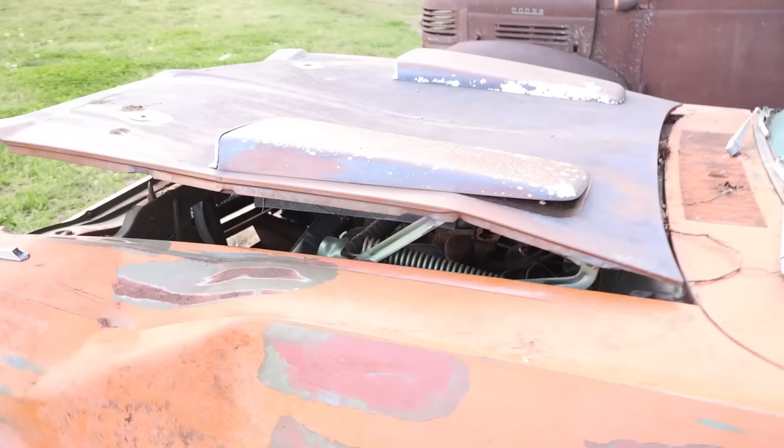But check out that, that is the fun part right there. Now, what's going on under the hood? Well, that may or may not be a problem. More than likely is, as you can see, the hood doesn't really do anything anymore. But up under here, there is an engine. How much of one is left? Not a lot. But it sure is a cool looking car nonetheless.

I want this thing to be a screamer. I'm talking ripping gears, spinning tires, you name it, this car should be able to do it. But it's not going to do it in its current form. Obviously, we've got a lot of work to do.

If you remember the Valiant that I rescued from the woods that had been sitting for like 40 plus years, this car was on the same property.

This thing didn't get any favors from Mother Nature, but that stops today.

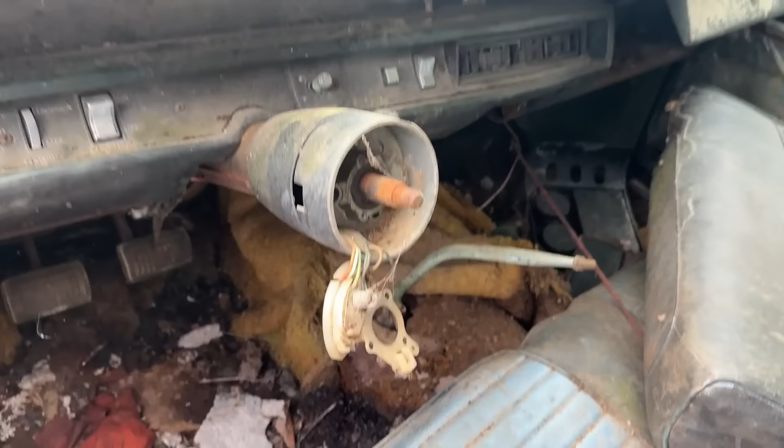A lot of noises. Oh, it's basically restored at this point. Look at there, brand new tire, all the tread. No steering wheel, so I'm gonna do the old trusty vice grips.

Will it not turn? Nothing's happening. Oh boy, it moved a little bit. Here, stand back, I'm giving it a swift kick.

What the heck? Nothing happened, that's not good. I didn't know that was a problem. I didn't either, how does that even happen?

I sure hope our transmission is going to hold up because the inspection cover has completely rusted away. That's not good. No, I mean, the good news is our frame rails still look good, at least up here, where the engine is held together.

Yeah, I mean, it's a manual steering box. I've never seen one just freeze like that before. I wonder if somebody pulled it by the tie rod or something, but it don't look like the tie rod's bent.

That might be a little bit of a problem. Not too sure if you knew that or not. Who needs to steer? I mean, we're going straight anyway.

Hey, Briar, that's bad.

Nothing's happening. Really just need to get this hood off, don't we? That would help.

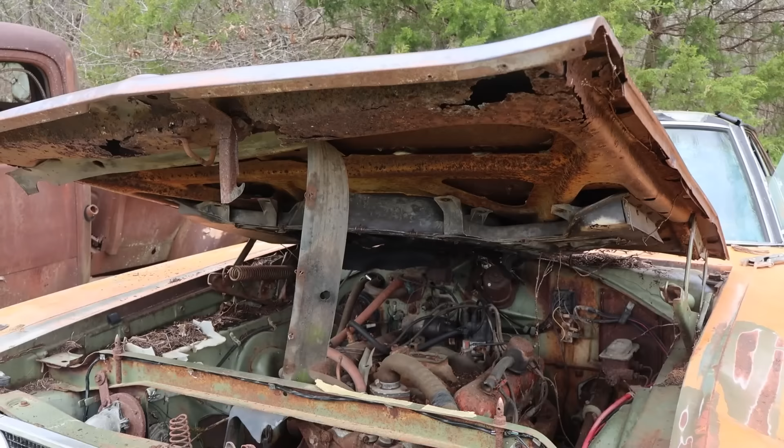Well, we were doing a little looking around and we're thinking that the steering box or the column itself has just frozen up completely. Interestingly enough, it looks like the previous owner had stolen a Coronet RT grill or a Super Bee grill. Somebody stole the little emblem out of it, but look at this, this is a factory air grabber hood. All of that's there, scoops are there. I noticed the scoops, but this is the first time I'd ever picked the hood up. I didn't realize it was a factory air grabber hood. That's awesome. It's not original to this car, but that is all original stuff. Pretty rare.

This is fun, I love it. Nice and slow, slow and steady wins the race. I'm afraid we've gotten in over our heads already, and we haven't even started yet. Hopefully not.

Sir, did you order the Coronet? I don't think I want it anymore. Well, I need somebody to sign. Could you sign this paper for me? I just work here, man. Just sign this paper for me. I work here too, I promise. Sir, I need you to sign this paper for me. Hey, you bought it, didn't you?

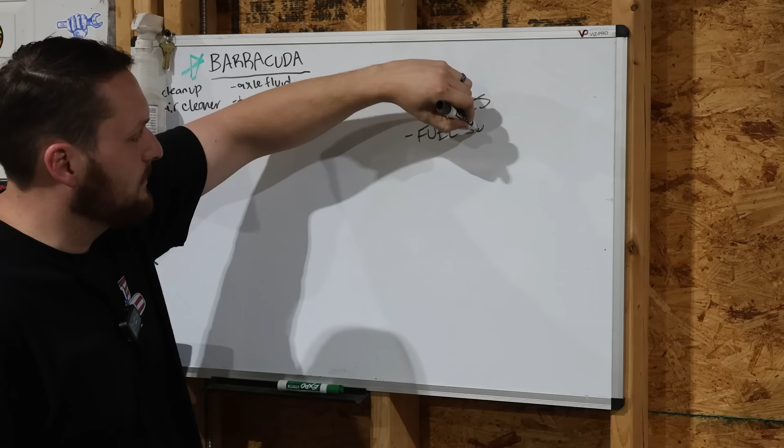So what are the necessities? We've got to actually do brakes, that's a big deal right there. Got to make sure we can stop before we can go. Next, we need something to power our engine, so of course a fuel system is in order. Obviously we need an engine, so that would be a big deal, we got to make this thing run. That's if our transmission works. Got to wire everything, so there's no telling what's wrong with this thing as bad as it looks, but we got to work out the electrical, and we can't let it overheat, so cooling is a big factor in this one. We're doing gnarly burnouts, we got to have something that'll spin the tires, so gears, but it may not be in the budget, so who knows.

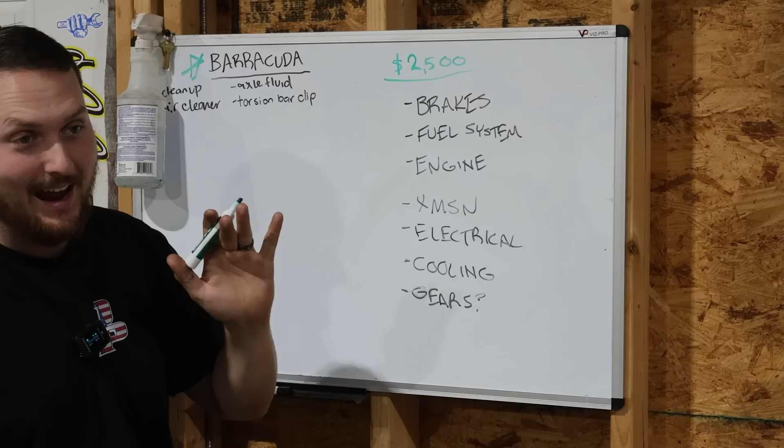Speaking of a dollar amount, what is the full budget? $2,500 smackaroos, that is it. And the bad part is that if I divide 2,500 by all these out, that gives us roughly $357 each. So we're going to break this down into 3 different categories for our pricing system.

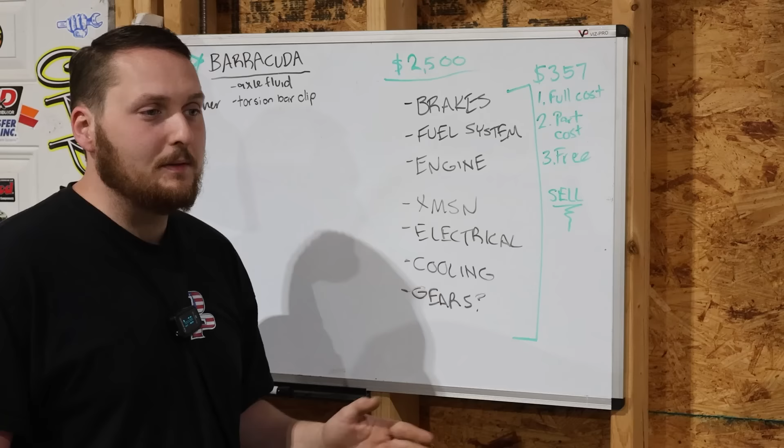Some things are just going to be straight up full cost. Like if we've got to buy gaskets, if we've got to buy this or that, we're going to have to attribute that to, hey, we had to spend this, therefore it goes to the full cost of the build. The second category is partial cost. Something that I purchased or something I already have, we're going to attribute that and say, this is what the percentage of that would be worth. Like for instance, if I've got a clutch over here that we're going to be using if the 4-speed works out, I did buy all this new, but it is technically used, so if I saw it on Facebook Marketplace, I'm going to count it as a percentage of the total cost of what it would be new.

Then at the very end, things that are going to be free, things that I just find laying around. And if we go over the budget, we have the option to sell items. So if we pull something off the car, we're like, hey, this might be worth something, or we might be able to do something with this later. That is value added back in that we will be able to put towards that $2,500 total.

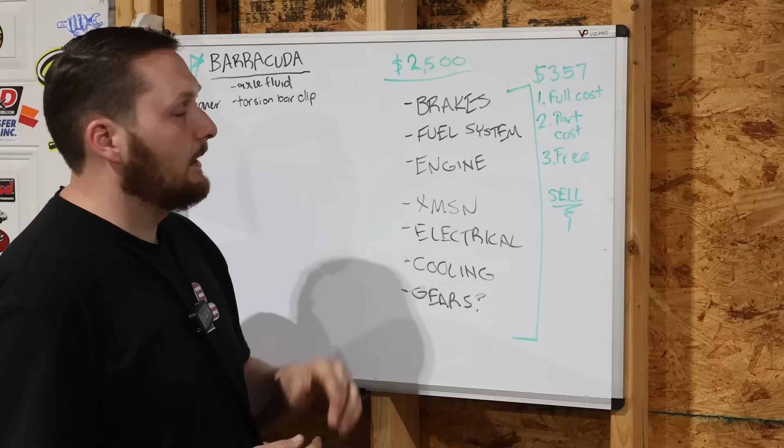Is this going to be fun? Absolutely. Is it going to be really hard? Yeah. Now, a quick little disclaimer: I paid $1,000 for this car, but I'm not including that in the budget because you might have spent way more or way less than what I have in this car. The only thing I'm trying to prove is that you don't have to spend a ton of money to have a lot of fun in an old car.

You might have something in your shop or behind the house covered up in a tarp that's been there for years, not running. I want to show you that you can do it, and you can get a little bit of money scraped together and have so much more fun than you realize. On top of that, the prices that I'm going to be listing in this video, you may find it cheaper, you may find it way more expensive. It's all determined on what the car is, the availability in your area. I'm just basing it on what my experiences have been and being super patient.

This stuff I've collected over years of working on these old cars. It may take you some time to get some stuff together, but if you are persistent, you don't give up, and you are constantly searching for these parts, you can do exactly what I'm doing today.

You getting the good side? Which side is that? I don't think there is one. Hey now, I'm sorry, Coronet. Whoa, I apologize. This side is so beautiful. Don't insult my Coronet 500, okay?

So again, this is a 68 Coronet. As you can see, there are multiple different colors on here. This appears to be the factory green, and it was green with probably a green interior, and then at some point possibly painted blue or purple, and then it got painted orange.

Wait a minute, why is that the same color as the hood? But no, this is a factory 318 two-barrel car with a 3-speed on the column. I decoded the VIN and it tells me all that.

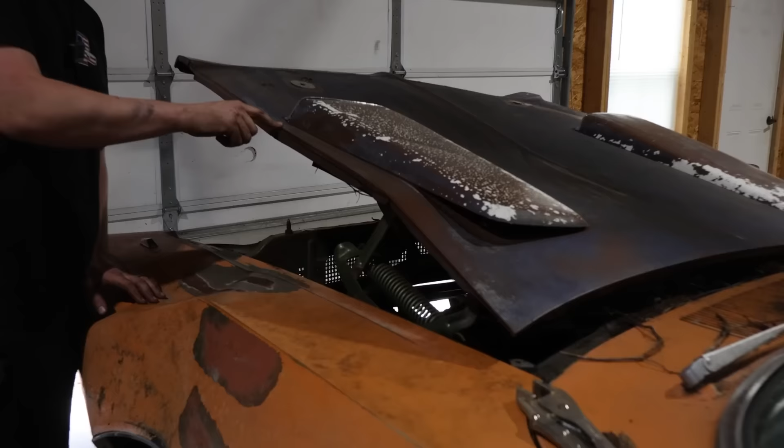Why is that the same color as the hood? The car got painted orange and it has a vinyl top on it. Oh wait a minute, there's the factory color for the hood. You can see it was this bronze color. So they painted it this color, but for some reason left this. It could have been black, honestly, and it just faded to purple.

I think it's been every color, honestly. The inside, it's there, not much to speak of. They had a blue bench seat in here. That is demolished. I've never seen the worst seat I think I've ever seen. Never seen one do that.

But the weird thing about it is, as bad as this car looks, the floors are pretty solid. I don't know how. He did have it up on blocks, so that might have helped save it, but the floors are actually decently solid from what I could tell.

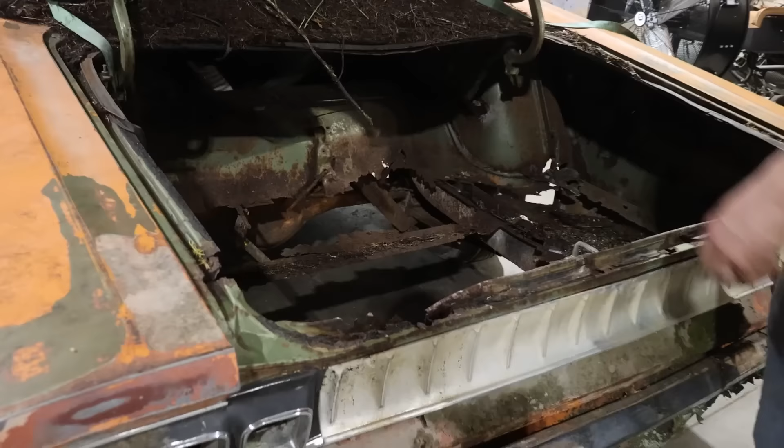Now, I say that for the inside of the car. The best part about it, really, the factory trunk delete. Bam, weight reduction. So yeah, there's not a trunk, so we really aren't going to be hauling anything with us. I think we'll be doing good to get the car down the road.

Oh, you were going that far? Maybe, I don't know what's possible at this point, because I don't even know how you're going to hold the trunk down, the whole support's gone. Beautiful ratchet strap right there. Oh nice. Oh, so we're good. Yes, that's all you need is a ratchet strap for the trunk.

Check out this chrome. Ooh, shiny. That must be 500. And I think it was an AC car because the glass is tinted.

Oh, this door don't open. Please don't tell me. Well, that's your door, so I don't have to worry about it. Drats, I'll just have to break the window, I guess. I guess so, that's fine.

Wait a minute, wait a freaking minute. Figured it out. Let me tell you a little story. The guy I got this car from had a 68 Coronet Hemi car, 4-speed, with a supercharger. I've seen the car personally, I witnessed him driving it down the road. He pulled into a store like it was a daily driver. The quarter panels were cut out of it, had zoomies going out the side, a giant supercharger, and it's a factory Hemi car with a 4-speed and a supercharger. I think it's still around here somewhere. When he passed away, this was another car that he had.

Guess what color that car was? No way, it was that color. Oh, the bronze. It was a bronze. So guess what, we've got his hood. We have a Hemi car hood. Best that I can guess is that's what this car came as, because it's a 68 Coronet, an RT or whatever he had, or a Super B, and it's this color, and I have the hood for it.

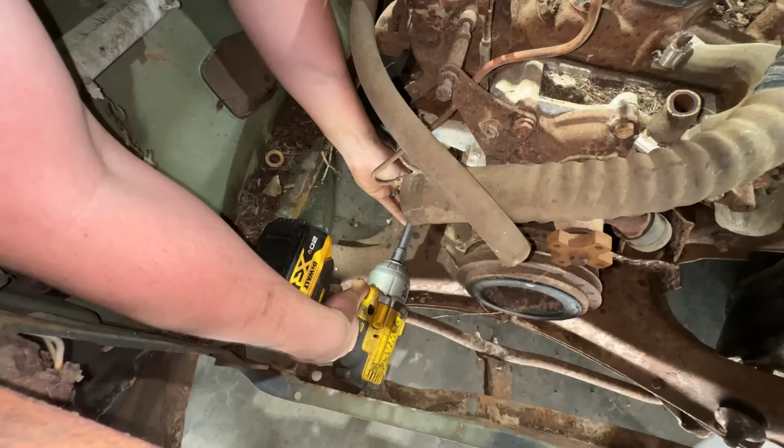Woohoo, one solid piece! Let's go, we're under the car. The floors, how do they look, Briar? They're all right. No, brother, they're immaculate. What are you talking about? Have you seen the rest of this car? These floors are fantastic, considering what this thing is, so good.

There's no rust that I can see at all until you get to the trunk. The trunk is obviously the worst part. There's an 8 3/4, the fender tag said 2.94 Sure Grip. I like it. The frame rails, at least where they count, look really good.

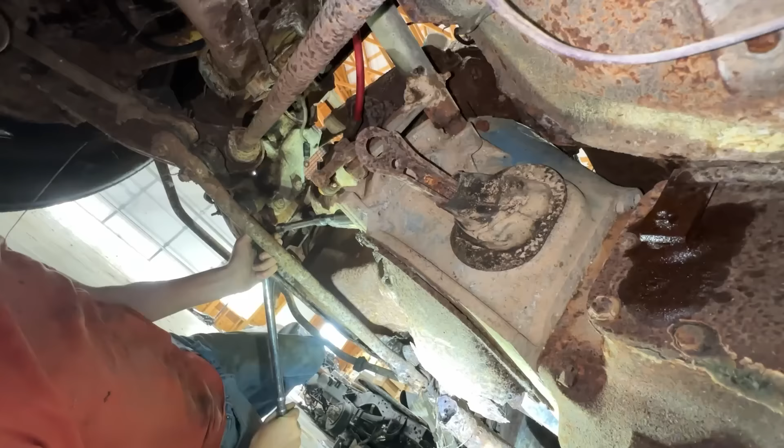Briar's working on motor mounts, and I was working on getting the 4-speed shifter and everything out of the way. The clutch, I don't know if the shifter's gonna work or if the clutch pedal itself is gonna work. We had no trouble at all with that one motor mount, but Briar cannot get that other one to come loose without a breaker bar. It's getting ugly. It is, yeah, severely bad.

I decoded the fender tag and it told us quite a bit. This car was a factory 318, and that's what we have here. But it was a 3-speed on the column, not an original 4-speed. You might be able to see right down in there, I know it's a little dark, but there are the original bushings for the 3-speed shifter.

That means this car obviously had a 4-speed put in it, which is really cool. So it's really nice, but my guess is that this is obviously the original engine. You can see the original paint being that metallic green.

So we're pulling the original engine out, and it's bad. We couldn't get the distributor to come loose, it's stuck in there, it won't turn. So I just pulled the cap off, and we'll hope for the best.

The engine's locked up, the water pump is even locked up. So the hood being elevated like it was, especially in the front and back, allowed water, trees, and everything to fall down in here and lock everything up, which is surprising because the rest of the car is held together, shockingly enough.

But I just wondered maybe they were robbing parts off of it because there's no radiator, no fan, no anything else that we had to really remove, no bracketry except for the alternator bracket. But everything else was pretty much gone. The only thing we had to do on the top side was remove the spark plug wires and then do the motor mounts. That was it.

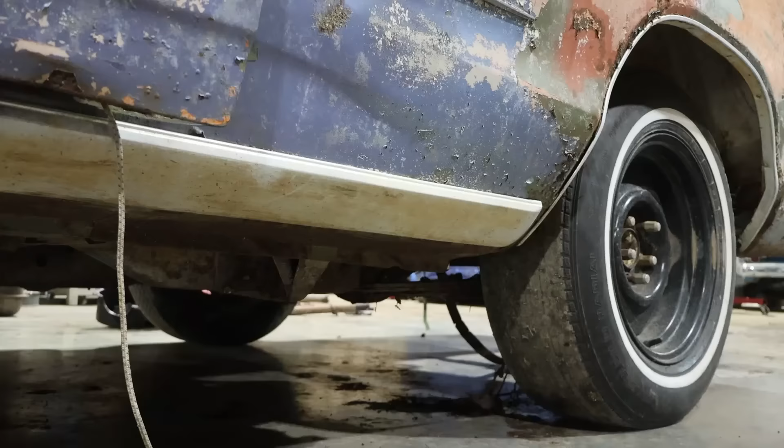Another little fun fact is when I was decoding the fender tag, if I read it right, this shows a 2.94 Sure Grip. Both of them spin, I haven't checked that yet, but how cool is that for a 318, 3-speed, and a 2-barrel? A Sure Grip? Pretty neat.

So we're going to actually rob that and probably use it for something else because we've got some better gearing in mind for this old rig.

The only issue that we really had was that bolt down there for the mount decided to break inside the mount, so we ended up having to pull the mount away from the block itself. We'll worry about getting that out when the engine's out of the way. But now we have our chain on, transmission cross member is pulled. It's going to be fun.

What do you think, Briar? I hope it comes out easy. There you go.

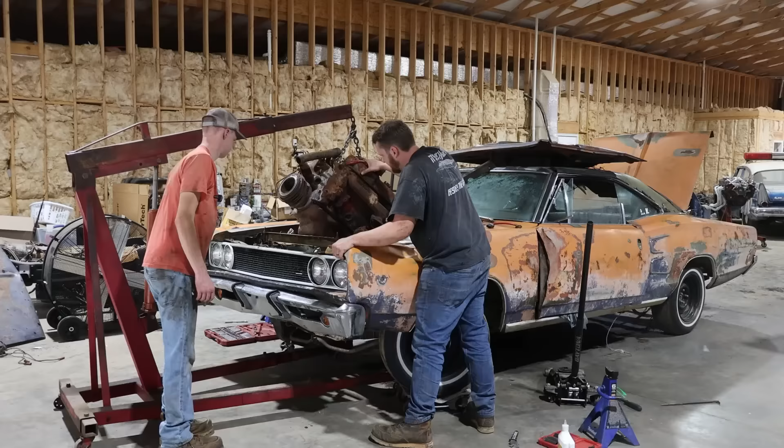I don't think it could have been more perfect though. Scraping the core support, scraping the firewall.

Whoops, hang on one sec. I can swing it. Well, no I can't. Just keep on going, if it'll let you go, then go. Come on baby, I want the 4-speed. Watch it, stopper. Heck yeah.

Only a giant puddle, no big deal. That sucked, that was not fun at all.

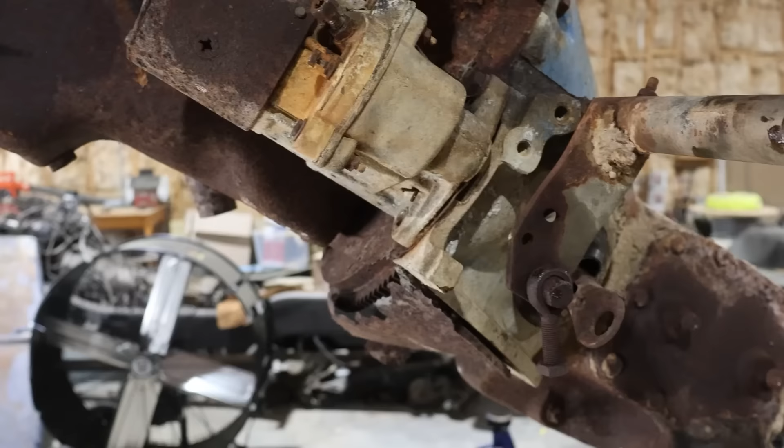Who knows if it'll actually work. The exhaust rusted in half on this side and the other side, and I really hope that our shifter mechanisms decide to work. It looks awful. I couldn't get the distributor out, so that held us up too. It's completely unbolted and it won't move.

Did you say you wanted it? I don't think I do want it now, looking at it.

Well, our transmission is on the ground, but we noticed this. We have an ear broken off on one of the mounting bolts. There's still 3 in there, but one of them is missing, so hey, 3 out of 4 ain't bad. That bolt is not wanting to come out.

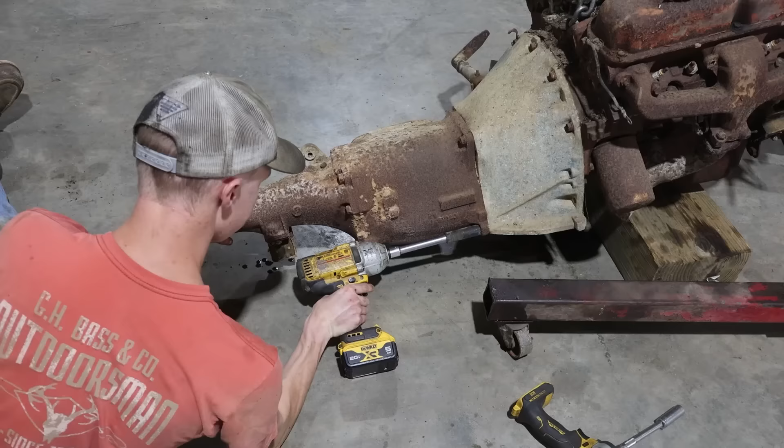Nice. Oh, that was bad. Well, here's the hard part, I gotta catch it. There ain't nothing light about that bad boy.

Hey, I'll get the heavy piece. Don't worry about it. Okay, thank you, appreciate that. I want to see how long it takes him to notice that there's 2 forward-facing bolts.

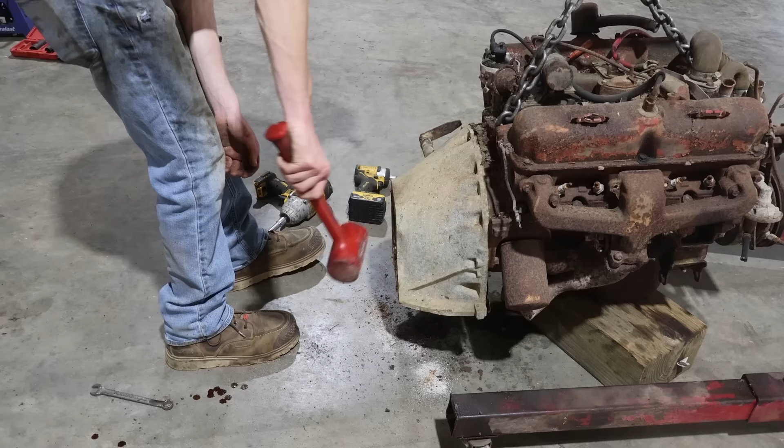So far, he hasn't noticed. I'm not gonna say a word, but I had to walk away because I'm laughing.

Before you wedge that in there, would you like me to give you a little tip? What did I miss? You want to check the 2 rear-facing bolts? Yeah, I thought about it, but then I was like, I never pulled a manual, so I didn't know the bell housings both had those. I was gonna let you go, but then when I saw you about to wedge that sucker in there, I was like, yeah, I better not. I wasn't gonna go far with it. Just until it broke in half.

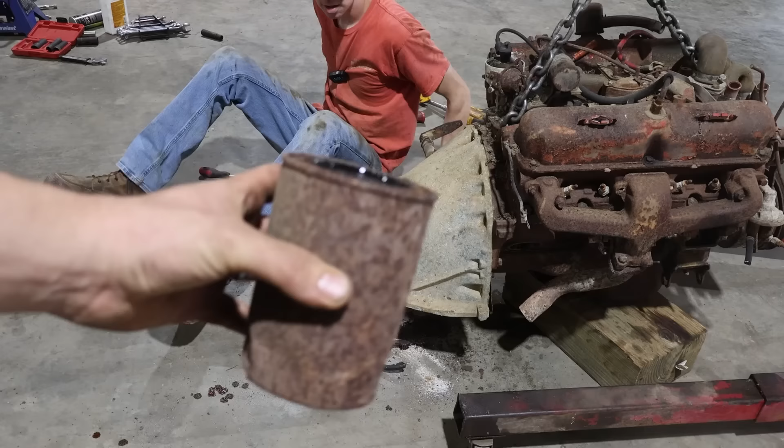Just pulled off the old oil filter. If you guys can guess in the comments what brand this is, let me know, because I can't see it.

Look at the rat's nest in there. I got a peek of it. Oh, it's stuck on the flywheel for that inspection plate.

The throwout bearing came out in 2 pieces. It's just gone, it's tired. So unfortunately, this engine probably wasn't going to run. Got a rat's nest right there, flywheel that is stopped up. Now we just need to throw this thing away. Paperweight, basically there's nothing usable on this thing.

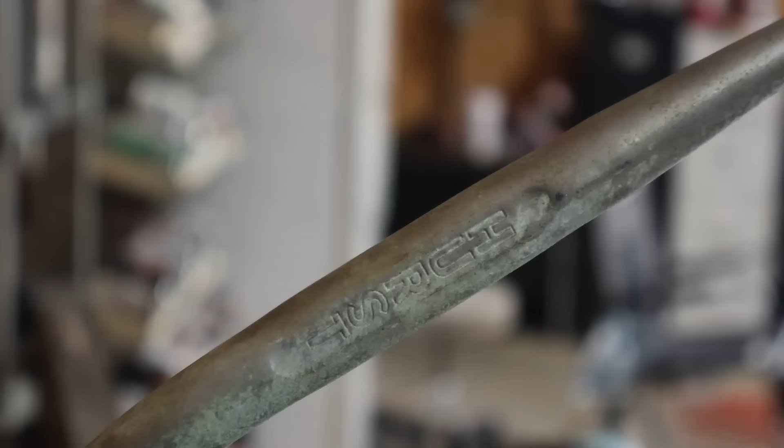Watch it be like beautiful on the inside. Oh, not bad, no, not bad. Check that out, this is the original Hurst shifter. Well, it's not original to the car, but it is a B-body shifter, meaning it probably came out of some Roadrunner, Coronet, GTX, you name it, and it does not work.

I can't get any of the shifter rods to move, none of the levers move, so I'm going to take my lightning bolt blaster and just spray everything down and let it sit for a little while. I'm not going to be in a hurry. We're going to let this kind of take its time, come back loose, spray all this down, and hopefully next time we come back over here and mess with it, it'll start to wiggle a little bit more and a little bit more until we can use it again, and with a little persistence, get everything working.

Look at there, so all these are moving independently of each other. I need to spray a little bit more on it to really make sure it stays that way. But I also got the levers to come free too.

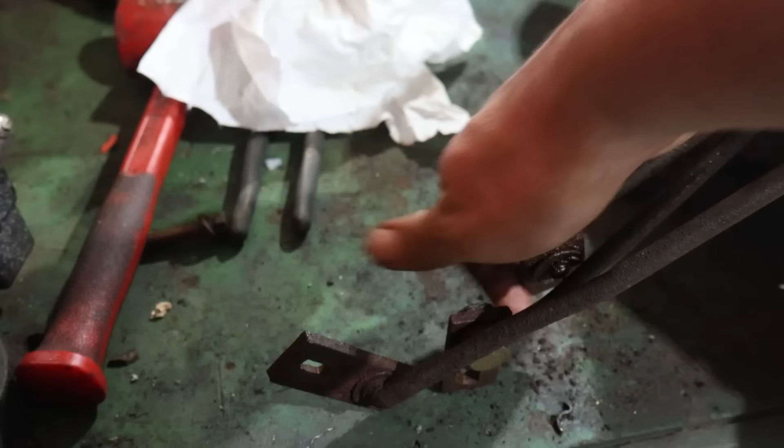Well, we had a combination of chemicals here. I used some brake parts cleaner here because there was this trash all in between the shift levers and everything. We got first, that's first and second there, and then over here, third and fourth. I can't get reverse to quite work, the lever goes back and forth, but I can't get it to go all the way in.

But we have all four gears, and I guess that's all that matters. So there's first, second—whoop, second's a little sticky—there it is, second, third, and fourth. And neutral, and the shifter bounces back like it's supposed to, so it's got tension on it. I think it's totally usable.

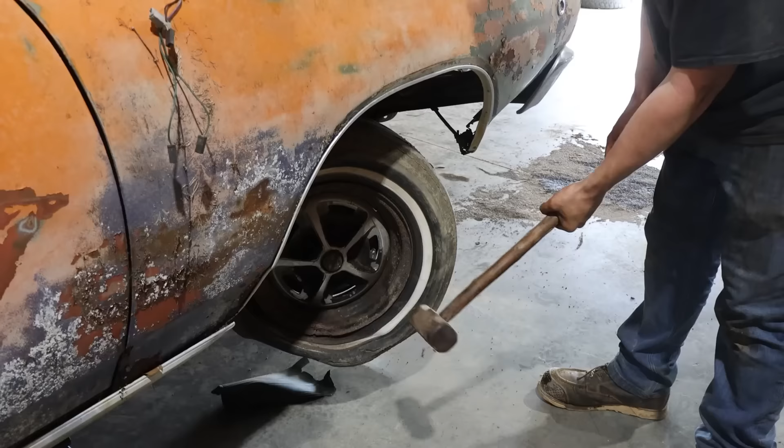Well, as you can see, the car doesn't want to turn, so I've got a sledgehammer and a junk wheel. We're going to try and just hit it as hard as I can. Don't be scared, are you ready? Oh my gosh, I think we just lost 50 pounds of dirt.

I don't know if you knew this or not, but that's stuck. Yeah, it's solid, hasn't moved yet. That tie rod works, it moved a little bit. The idler arm is, I think, moving. Oh yeah, it's moving, okay. It barely, but it moved.

So it's definitely the pitman arm then? Could it be the steering box? That or the box still. Easiest thing to do, we'll pull the steering link off and just see if that is it, and if everything else moves outside of that.

We wiggled the column and it seemed like it wanted to move, but we can't rotate it the right way around to get the roll pin out. The nut right here looks awful. You think it's removable? I'm about to find out.

Okay, back under the sunroofed car with Briar. Nice, I love when my car's growing trees. It's environmental, it's something, you could call it eco-friendly.

Oh, there you go, I don't know if I'm going the right way or not. As long as you're going a way. Go your own way—who sings that? I always get it mixed up with Any Way You Want It, and that's Journey. Correct, but I can't remember the song I was singing, Go Your Own Way? Yes. Oh my gosh, I feel like I definitely should know this, probably listened to it here this last week, but I'm drawing a blank, I don't know. Oh, Fleetwood Mac. Oh okay, yeah, I remember that now. No you didn't, R.I.P. to your body. I know I'm gonna close my eyes anyway, even though I have glasses on.

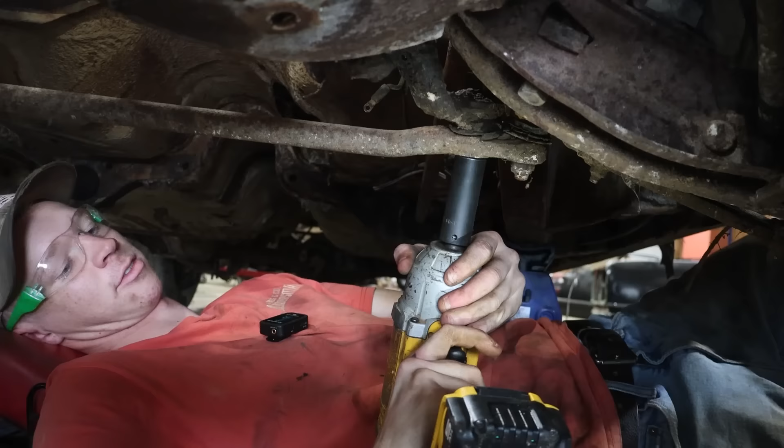Oh, wow. Wow, I'm not even under the car and I got hit with stuff. Oh yeah, I'm covered, dang it. Your pickle, sir—I hate pickles. I have come for your pickle.

So I need to do the tie rod first then? Yes. How about it? Nice. Oh. Yeah, so we've eliminated that. There we go. I've been pelted, you're covered in it. Oh, you've become one with the Chrysler products. Give her a good thwacking.

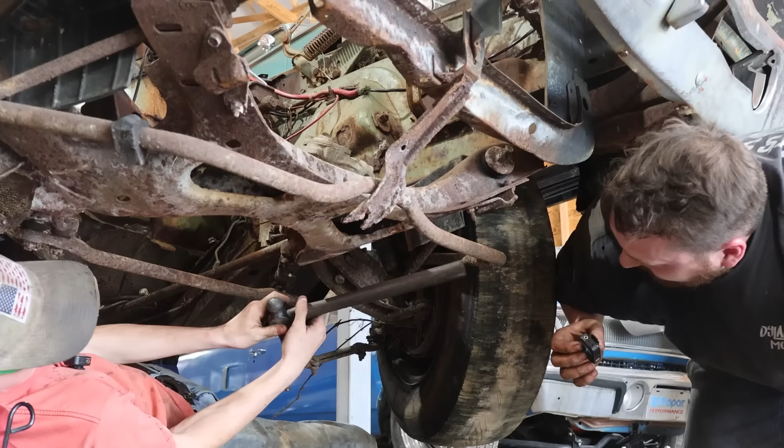Other way, goober. Oh. Is the spindle stuck? You gonna try to hit it with a hammer now? Let me get out, yeah. Oh my goodness, it's all down my shirt.

There we go, oh I see. This cotter pin right here was replaced at some point, and it's rubbing the inside of the spindle, so I'm gonna bend it down. Look there, good as new.

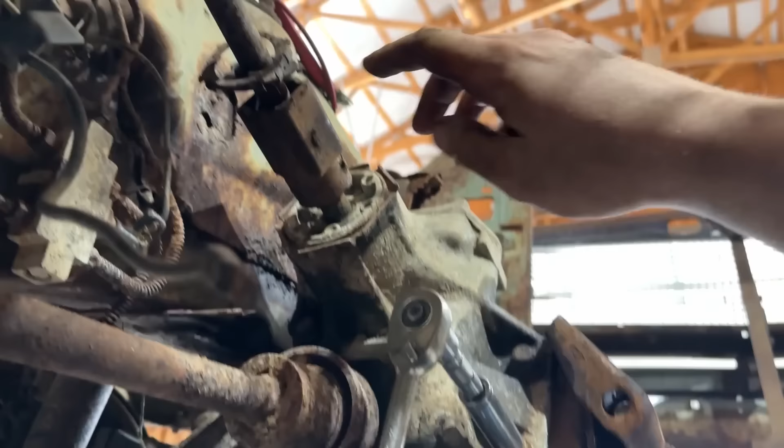So I'm gonna pull the steering box. Briar's working on pulling the steering column. We're gonna slide this all out and rotate this coupler so we can drive the roll pin out of it and get them separated. The good news is that we have replacement parts for both of these, so we'll factor that into our budget, but it's used parts at the end of the day, so I just really hope that this works.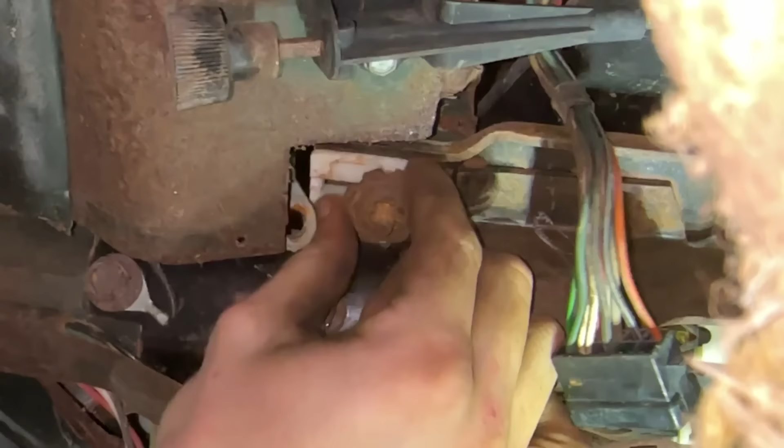Yeah, I'm pretty sure that the box is fine. I think the pivot arm's moving, I can't really tell. So the column's locked up. We just pulled the column completely out because the coupler is shot. But look at that, so the steering box is fine. It's something wrong with the steering column.

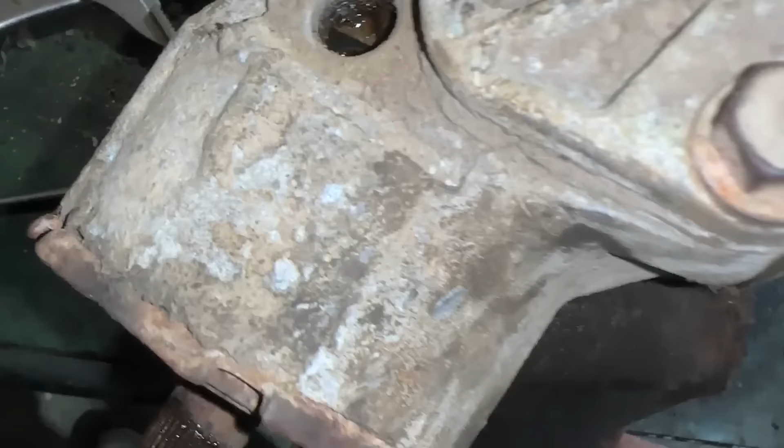I pulled the fill plug off the steering box, and you're supposed to put grease in it from what I've read. I don't want to pull this cover off and mess up the adjustment. Some people say you put gear oil in it. I'm just gonna fill it up because it's bone dry and anything is better than nothing. But look at there, it's actually working. It's just got a hard spot in the middle, and I wanted to make sure it was properly lubed. It sounds awful, so we can put a little bit of that in there, just some kind of fluid—anything's better than nothing. Got my bucket here.

I'm gonna put a little bit in there. Oh, that's too much. Whoops. Perfect. Thankfully for us, we've got a whole parts column.

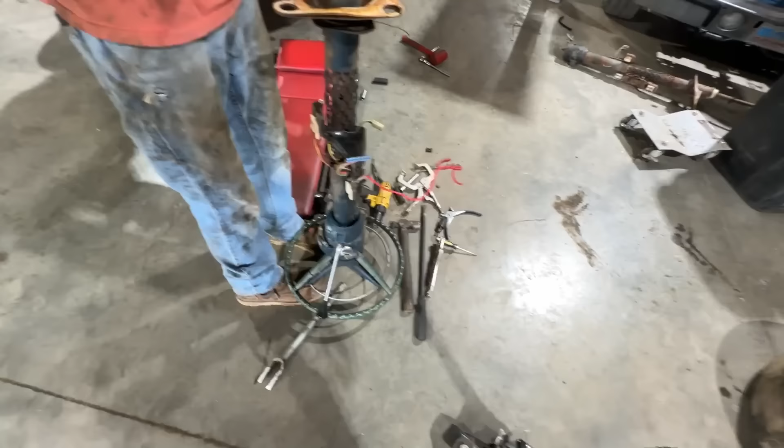This came out of a '70 satellite. Briar did most of the grunt work. That was a fight, but we got it out of there. The only difference is it has the key in the column, but we can make that work. That helps, because we got a new key. We didn't have a key before, so that helps a little bit.

So let's go ahead and slide her on in there. What do you think that's worth? A hundred bucks. He said it, I said it too, so that means it's a hundred bucks. It helps that it's blue, right? I like blue, that's extra points. It might match, I don't know. It matches our broken seat. Look at there, beautiful.

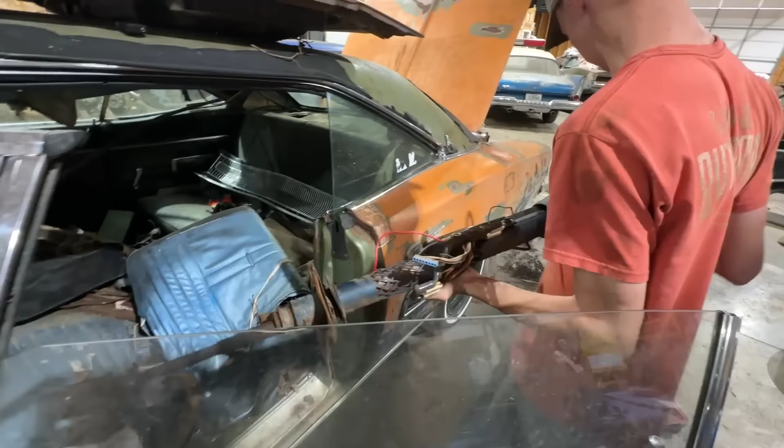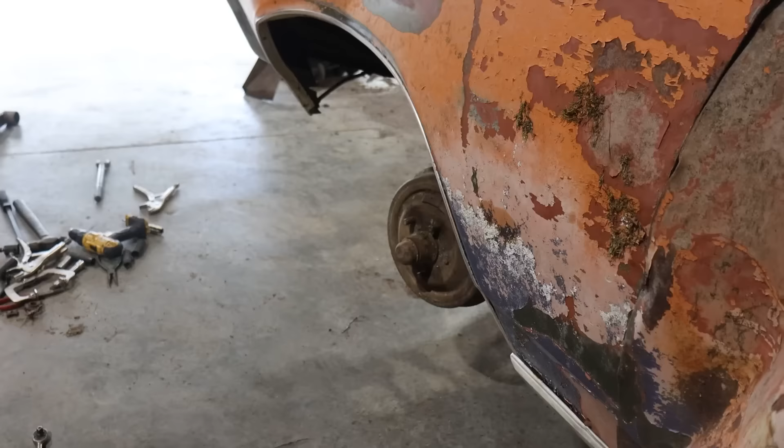Whew, that was a lot of effort. But the good news is, look at all this. It's bolted back in, our steering box is perfectly fine. Our steering column now works. It's bolted back in, and it's technically an upgrade because it now has a working key that locks the steering column. So turn the key off. Look at there, so there's a little theft protection, but look at this. Steering wheel, what a fun thing. That was a lot of effort to make that happen, but it finally does work. I'm very happy with that.

But working on this car under the dash is miserable, only because of all this trash that's in here. I'm gonna have to get up under there eventually because I've got to rig up all the steering column wiring, since it's a totally different setup. I don't wanna be laying in that. So next thing, we're gonna get this back on the ground, clean out the interior, and get the engine bay cleaned.

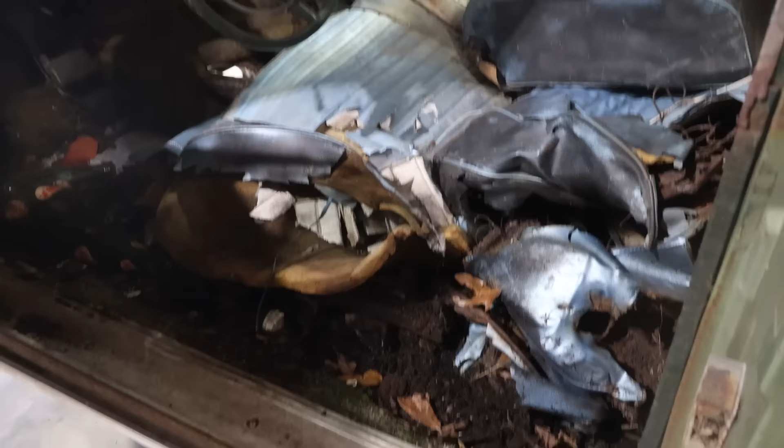The other side, I had to cut the nut off the bolt to get it loose. So this side didn't do as bad, but look at the seat springs. Golly, there's nothing left. Wow, oh, it just fell off. Okay, so there you go. As bad as this looks, look at the rear seat. Why is it so nice?

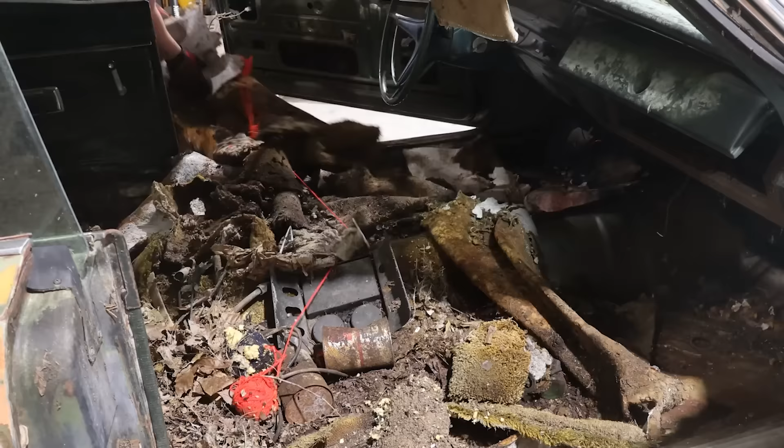Now that the floors are all clean, we got a really good look at how nice our floor pans are, considering the condition of the rest of the car. We did have some holes in the passenger side, but really this is the worst of the damage, and it's a totally usable floor pan.

Thankfully we don't have to worry about anything in the rear, underneath the seat pan. All that was good to go. The back seat actually turned out to be very nice. No data sheet underneath there, I did check that. And here's a grille that I actually put in the car myself, I was storing it over there.

Look at all these bottles that I found. They love Sundrop, Coke, RC, Double Cola, you name it, this thing had it. We also had the original carburetor, which is pretty nice to have. We're not reusing that, obviously, but we got it.

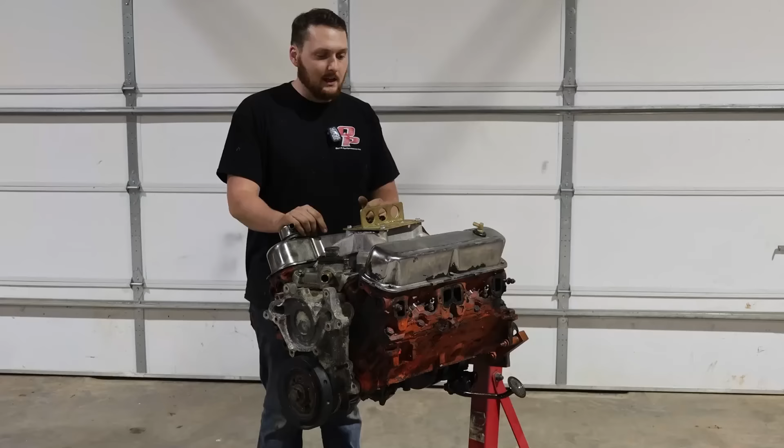Now, if you watched a couple videos back, we actually pulled this out of my 1972 Dodge Swinger. I put this in that car probably 12 years ago, and it was bad. So this thing runs fantastic, but as you can see, it's filthy. It's covered in oil because this thing would blow oil out the dipstick tube from so much pressure built up. The cam bearings are shot, so you have to run 20W50 in this thing to actually get some kind of oil pressure. Even at hot idle, 5 PSI.

So we consider this engine worn plumb out, but it has a good camshaft. It's got a good top end, valve springs, and a decent timing chain at some point, but it's been stretched to oblivion. But it's got a Comp XE268, did head gaskets, intake gasket, and it's got an Edelbrock Performer RPM intake on it. We just have to go swap a lot of stuff over like timing cover, water pump. So there's a lot of things that have to happen for this engine to actually fit in the car, but I think we can make this thing work.

Now, how do I classify this? If I were on Marketplace, I'd be looking for a 318 or 360 engine. I've gotten these engines basically from free all the way up to however much you want to spend. Typically if I saw this engine with an aftermarket comp cam and a good intake on it, but low oil pressure and needing a rebuild, it could see $500 to $800. So I'm gonna just say, yeah, I talked him down, I'm gonna pay $500 for this bad boy because it's missing all the front end right here. It's gonna need an oil pan, manifolds, quite a lot of stuff to make it work.

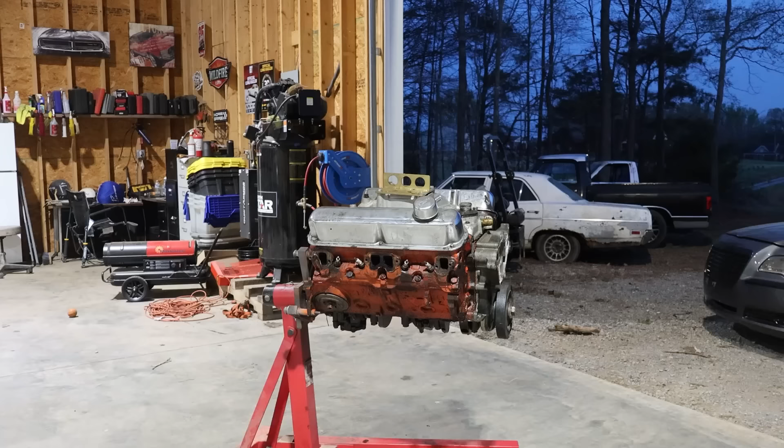But you know what, we don't care. You've heard of rattle can rebuilds. This is a high pressure water rebuild. All right, let's see how much paint survives here. Oh boy. Not a lot. Yeah, let's clean those exhaust ports. Wow, fully rebuilt for next to nothing? Sweet, consider it done. What about all the water inside the engine? That's just extra lubrication. We're not gonna worry about that.

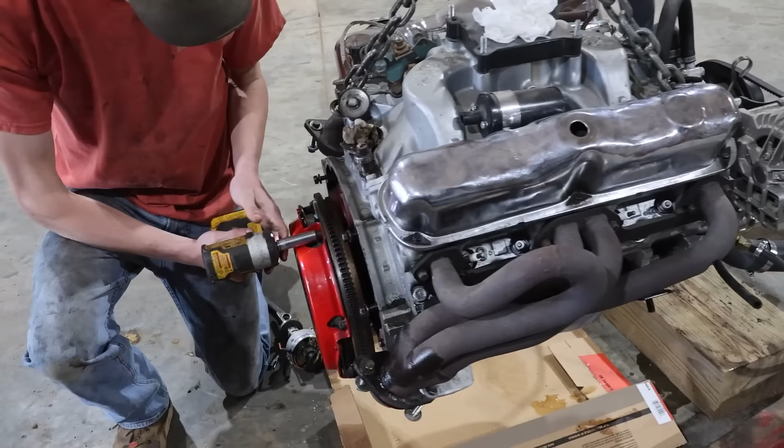We're stealing parts. As you can see, this is an engine you might recognize because it came out of that car, but we're gonna talk about this project in a future video. This is something we're working on in the background, but we need parts off of it. So we figured we'd steal the clutch and flywheel because this car is going back with an automatic. But this clutch and flywheel is perfectly fine from McLeod, and we just need to steal it. It's an entry-level clutch, but it worked awesomely. It's a 10.5-inch flywheel, no problems with it whatsoever. It's technically used, but very few miles on it.

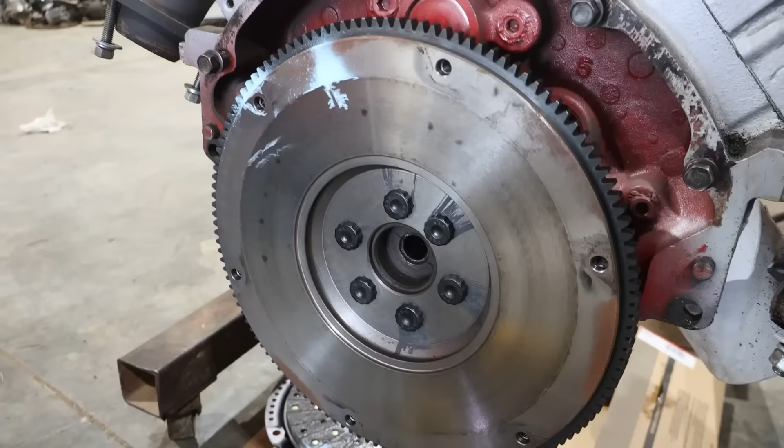We'll do 75% of the cost since it's used, and I'll put that on the screen right now of what these go for, or what I paid for it, I don't even remember. Heck, it might not even work, the 4-speed in the other car might be junk, so we may end up getting our money back on this. This was just a stock replacement flywheel, and that should just buzz right off. I think we used ARP bolts too, and we're not gonna count that to the budget. Don't tell anybody, I don't even know why I use those.

Well, I made a goof. This engine is externally balanced while this engine is internally balanced. Now, we stole the flywheel, pressure plate, and clutch off of this 318 to put onto this one.

I forgot about the flywheel, so it needed to be an externally balanced flywheel, and I don't have one. So what we're going to end up having to do is use the 318 we took all the clutch stuff off of. Now, as far as making it fair, this is a 318 with a comp XE268, just like this engine. I'm going to take the intake off this one because it's a nicer unit. To be fair, since I was going to have to pay $300 anyway for a flywheel to use this engine, we'll just call this one an $800 engine.

Plus, it's got our pulleys, accessories. It's got a mechanical fuel pump on it that's stock. So I think adding $300 to this one will make it fair. We really want to hear this thing roar to life, and I'm really looking forward to it.

So we got to put the flywheel and the pressure plate and everything back on this one, and then hopefully we'll be able to drop it into the car and put these on it. So that's another thing I got to mention. I traded for these for a set of headers on a different project.

If I saw these online, I would think they'd be like $150, $200 for a set of used A-body headers. That's the thing, they're actually for an A-body, but they should fit our B-body. Now, if that doesn't work, we can just take that off the budget. But I think a $200 set of headers ought to be pretty nice, don't you? Absolutely, it ought to sound mean.

We stole the RPM air gap off the other intake. Don't mess it up, you're not helping. Beautifully done, that's just how I roll, brother.

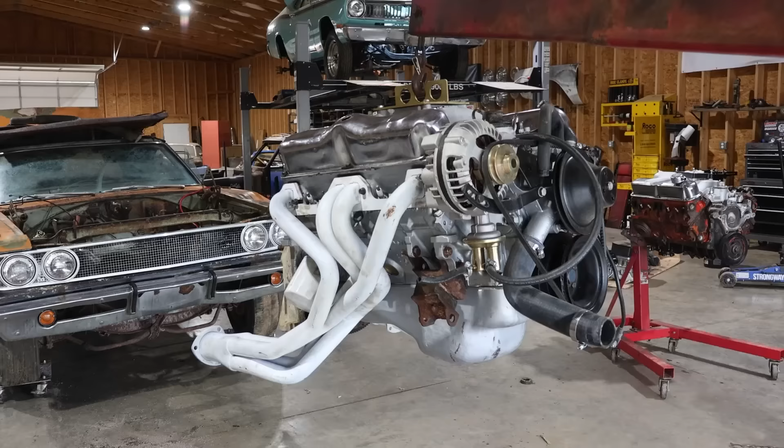Well, here we are, the engine's ready to install. We have our mounts on. I actually had to modify this one, so it only had a bolt hole for this and this one. Guess the block's different. You can see how it's supposed to mount right there. I ended up having to drill a hole on this side to get it to mount, and it worked.

So no problems there. We've got our headers on. These are for an A-body, like I said, and I really hope that they work. This side is super dirty, so I'm going to try and clean it up before we put it in. It doesn't really matter to me.

They were already painted when I got it, and it's not in the budget to paint these things, but they clear our shifter linkage, the Z-bar, all that stuff. It looks like it's going to clear. I hope the torsion bar clears.

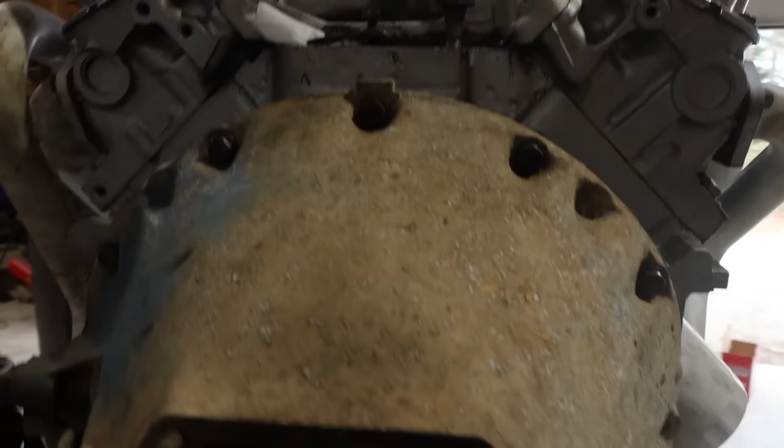That's the only side I'm a little bit worried about, but we were able to get our clutch and flywheel back in there with our new throwout bearing, so all that's installed, and we have our oil filter back on, plenty of room to do that. And the oil pan was already a carb pan, so it'll drop right in place and we'll be all right. I'm really looking forward to seeing this thing in here.

The intake is dry, we've got all of our fittings in where we wanted them. The Z-bar, I still couldn't get it to come out, so we're gonna have to install it the way it came out, but I figured if I don't have the transmission hooked up, it should be a little bit easier because I don't have to swing it up so nose heavy. So we're just gonna drop it in level and then swing the Z-bar in place.

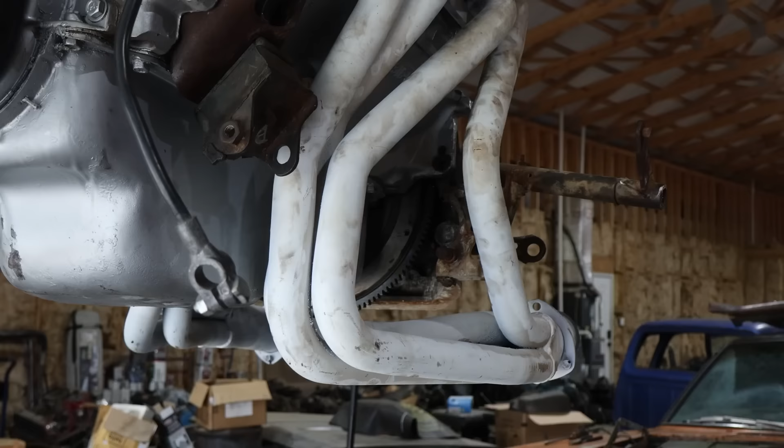I got to thinking about it, and I think the center link for the steering rack goes in between the headers and under the oil pan. So I went ahead and popped it back loose just in case. If it doesn't, it's not a big deal. It took all of like 5 minutes just to pop that back loose. A little insurance just to make sure, because I don't want to be fighting that thing.

I may regret trying to put this thing in with the headers bolted on, but we're going to try it anyway. Probably should have tilted the engine back in here. These headers go so far up behind the bell housing. Might be a little bit of a pickle here. I don't think we can do it.

And the good news is I couldn't care less if we scratch something, it does not matter to me whatsoever. Slow and steady now. Please just get around that steering box.

That's all I ask, and the torsion bars - I don't want to have to remove one. I'll put manifolds on this thing in a heartbeat. I'll be honest with you, I just wanted the headers because they look cool. This ain't gonna make any power, it don't really matter, I just wanted it to make cool noises and look awesome. And it does do that.

I can put it in kind of sideways, which we're gonna have to do anyway for the Z-bar. Okay, we're clearing at a 45-degree angle, but we're clearing.

Oh boy, oh boy, what's happening? What do we hit? Oh, okay, and stop. Now we're wedged in sideways. I really should have tilted the engine back just a hair, that would have helped me out. This is such a tight squeeze.

Okay, now we're touching the fuel pump, so I need you to scoot back some. Ooh, we're cooked, we are absolutely cooked. I've always installed headers after the fact, so now that I know, we'll know for the next go around - you know, for whenever I blow this motor up and have to put another one in it, which I really hope doesn't happen. Now we clear.

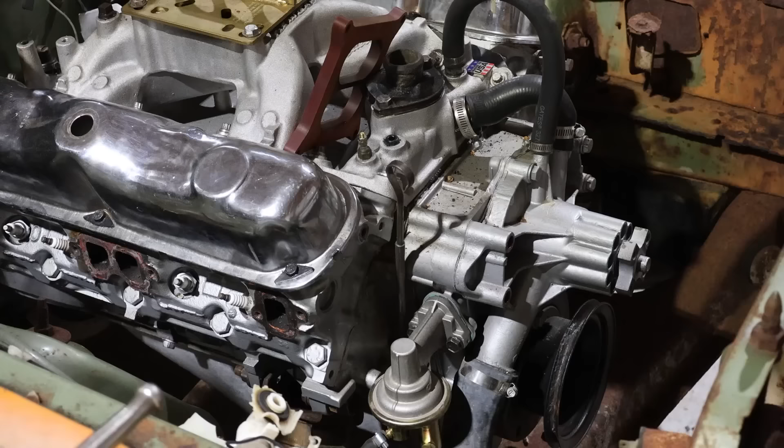Well, now that we have the engine and transmission set in their final resting places, I'm going to start putting all the front accessories back on, and to start, it's the alternator.

There we go, passenger side in.

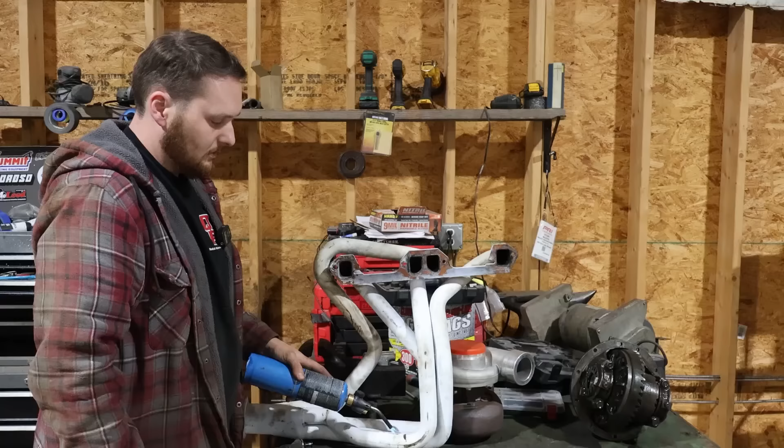Well, here's the thing: whenever you use used parts that really aren't meant for the car, you got to kind of modify it. So these headers were very, very close - we had them bolted in, and the steering link goes right between the headers, and at full lock, both directions, it was hitting. So I marked it with a Sharpie right there, and we're just going to put a little bit of a modification dent, if you will - it's more cosmetic than anything, so don't worry, just don't get upset about this, it's fine. All right, this is precision, we've measured accurately, and it's going to be right about there.

One for good measure. Does it taste hot? You tell me. Ow! So this is the original starter solenoid that was on the car, and I am shocked to say it works. Listen here.

So when I pull this power wire off, it's triggering it. That's going to a 12-volt source, and I wanted to make sure I was getting power out here. So whenever I take the battery lug and trip it over to here to get power to it, look at this. We're getting 12 volts out of right there, which is what triggers our starter. So that means this works.

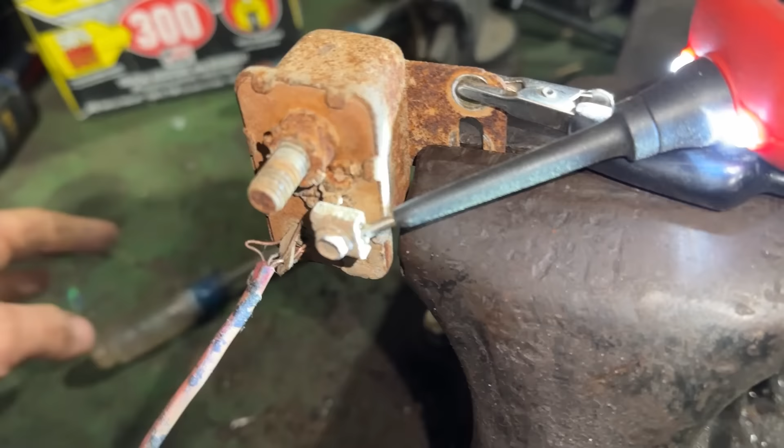So I'm going to clean this up real quick, because that right there is the ground. It needs to be cleaned. Get all the terminals cleaned up so that it works and doesn't cause any issues. But I am shocked to say, as bad as this thing looks, it works.

Well, here's a status report. As you can see, the 4-speed shifter is in and it's working. We got the cross member bolted in, so that means the transmission and engine are permanently mounted. No more removing. So you saw us fight the headers. We got all that sorted out.

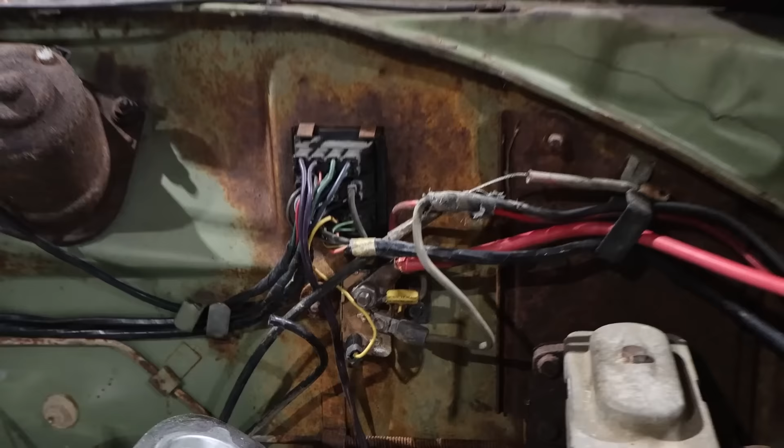We had to clearance one of the tubes for the center link because it actually goes through the header. Once we got that sorted out, they fit fine. So I put new gaskets on it, got everything bolted in. So those are tight. Then you saw me working on the starter solenoid. Got all that bolted in. Got all the wires back where they're supposed to go.

The old battery cable was broken and really green on the inside, so I found this one on a truck. It works, I think, so we're going to use that, and I'm going to get the ground cable off of the same vehicle. I had to fix one cable in, but that's it. I mean, everything else seems like it's okay. I'm hoping that it'll work. We're going to test that here in a minute.

The big progress point that we've made here is a radiator. So this came out of a 1992 Dodge truck, and it was running, so I can verify that it will not leak. How cool is it going to run? Don't know. But it will actually flow coolant. And our radiator hoses should line up. That came from a small block, so it should work exactly the same.

You can see the bottom hose worked out fine. So what I had to do was actually get one bolt in a factory location right there, but on the other side, it wouldn't line up just right. So I ended up having to do a self-tapper there, but no big deal.

You can see it way down in there. Because I was a little worried on how this was going to work out, since these cars had a 26-inch core support because this is a factory air conditioning car. If you didn't have air conditioning, it was a factory 22-inch, and I think you could optionally get a 26-inch. I had a 22-inch, but I couldn't find a 26-inch. So this one worked out, and it should do the trick.

I mean, it's from January of 1996, so it's not original. It's a replacement radiator. It's just 29 years old. So no big deal, guys. Don't worry, it's going to be fine.

So what we're going to do now is button up some of this stuff. I actually found the factory shroud. When I popped the hood, it was just sitting in there. It's a little too wide, so I'm going to try and just zip tie it in there. But I got to put my fan and the belt on first. So let me button some of this stuff up real quick. We'll check back in just a second.

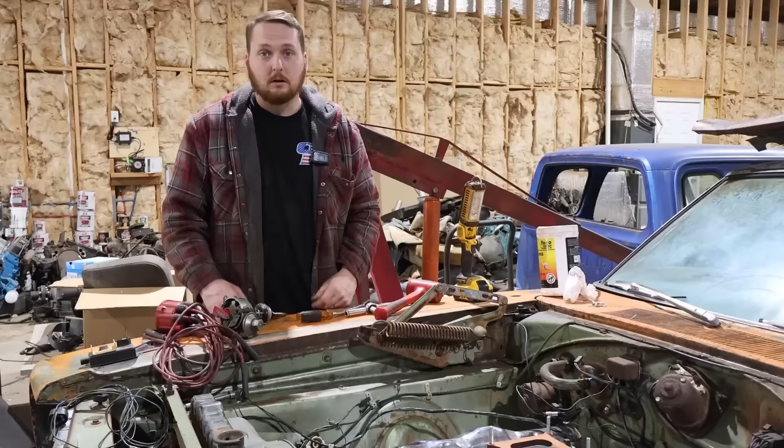Well, we made some progress. We've got the radiator hard mounted in. We've got our hoses all hooked up. And thankfully, all that worked surprisingly. We zip tied the shroud in. It's kind of janky, and I don't even know if it's going to do anything, but it's going to do something.

We've got our fan on, we've got the belt on, alternator, and we got a battery tray in as well. That came off the same truck that had the radiator. I just took 2 self-tappers, and there you go. Like magic, it fits. On the next side, we have to make this thing have some kind of spark. So to do that, we have a used distributor.

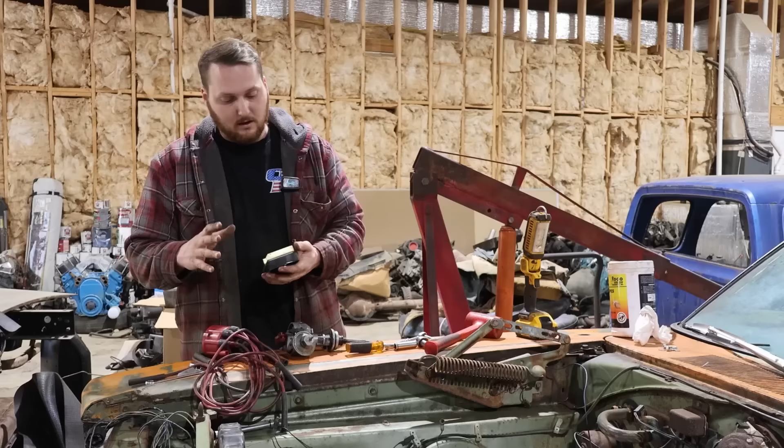So this distributor costs $25 from our local yard. The cap itself was $5, and each spark plug wire is $1, so that's $38 in our distributor setup. Then this used electronic ignition box was $15, so that's $53 right there to get all this done.

And when we took the ignition box, we made sure to get our wiring harness. Super simple to make work, so this is like the easiest thing you can possibly do. So we're going to go ahead and drop our distributor in.

And if I remember, it should be on top dead center, I really hope. Oh, there we go. So we have here a Dakota mini starter.

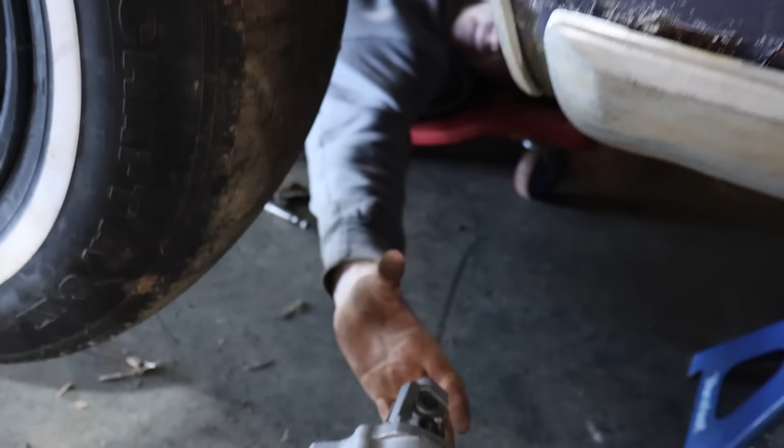Now this one's used. If you go to the junkyard, you can get one for $26 including the core charge. So there goes a little upgrade. It's nicer than what we had before, and it should spin it twice as fast and weigh about half as much. I love these old starters. I guess they're newer, but these starters are awesome.

Definitely going to need it for our header clearance because there ain't a lot of room in there, is there? No, not a lot. Imagine trying to do that with the original one. You couldn't. There's no way.

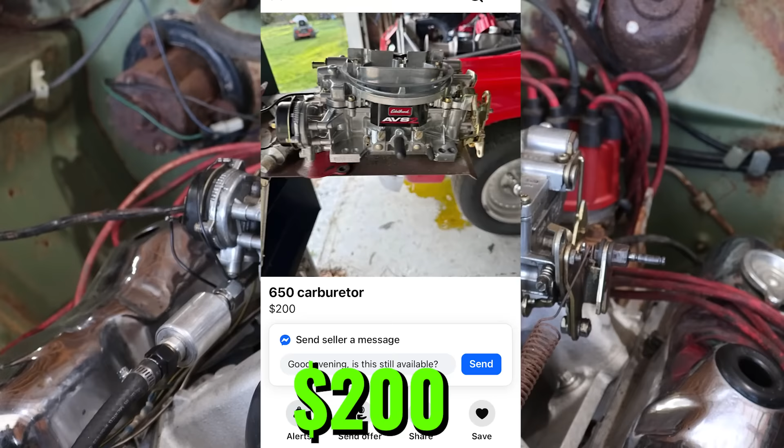Well, the moment of truth has arrived. We stuck our battery in here. This carburetor is an Edelbrock AVS2. Found this on Marketplace for $200, and it was supposed to be a good unit, so hopefully that's gonna work out for us.

We've got our ignition module mounted onto the firewall, got all my wires ran where they're supposed to be. We got a coil right there, the distributor's in. It needs to be bolted down, but I think everything's gonna work out for us. I mean, I don't know.

We'll find out here in just a second, but Briar has ran us a fuel line from our fuel pump down out to here, in a fuel hose away from the car as far as possible. This thing's gonna sound pretty mean with some open headers.

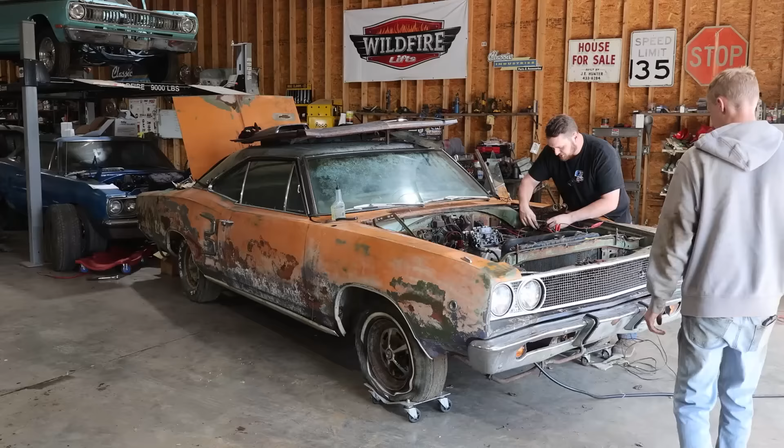Check for spark real quick, just to make sure I did it right. I put 12 volts to the ignition box and it clicked, so I guess that means something's right. Now if this spins over, things are good that are happening.

Whoa. Hey, it's firing. Whoa. Did it spark or did you see? I didn't see anything, I just heard a boop. So I said that's good enough.

Sounds like late timing to me. So that's what I'm gonna guess.

Is it the headers? It might be the headers rattling around. Are they touching the torsion bar? I didn't think they were. Oh, the clamp. Oh yeah, the collector.

I might have to rotate the distributor a hair. So I rotated the plug wires around to advance them. I don't think I was able to get enough of an advance on it. Oh, that's the wrong wire.

Oh, something happened. She wants to go. Are you ready? I'm ready. It's gonna be loud. Prepare yourself.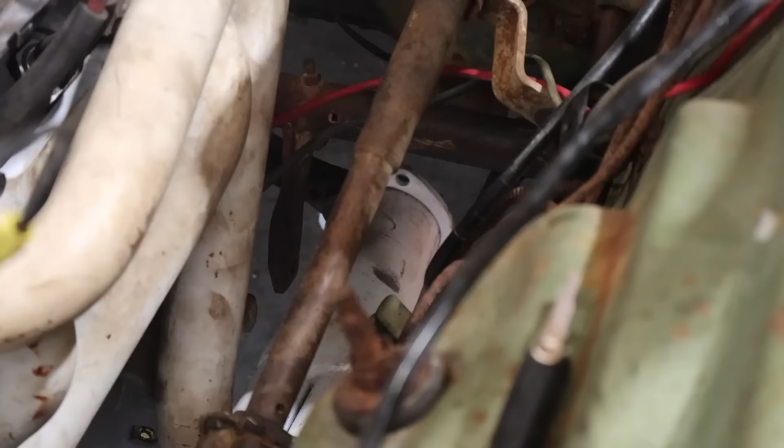I love that. Still cool to the touch. Sounds like it's trying to die. Are we out of fuel? No. Full? Maybe she's loading up a little bit.

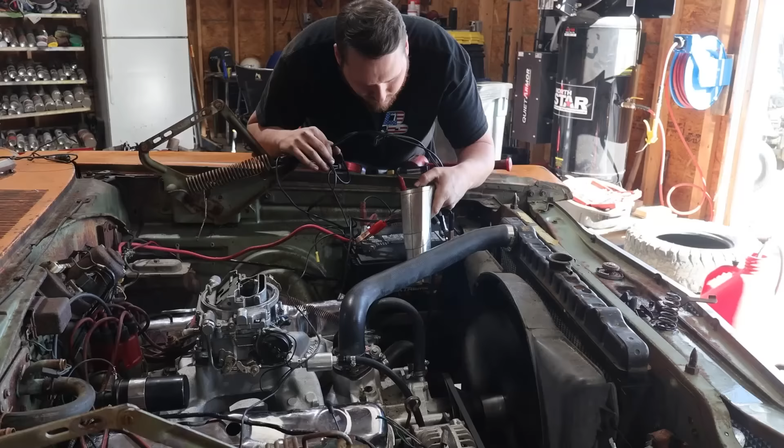It's idling. Like it's barking at me. Like that. Now, don't it? Yeah. Yeah. That's great.

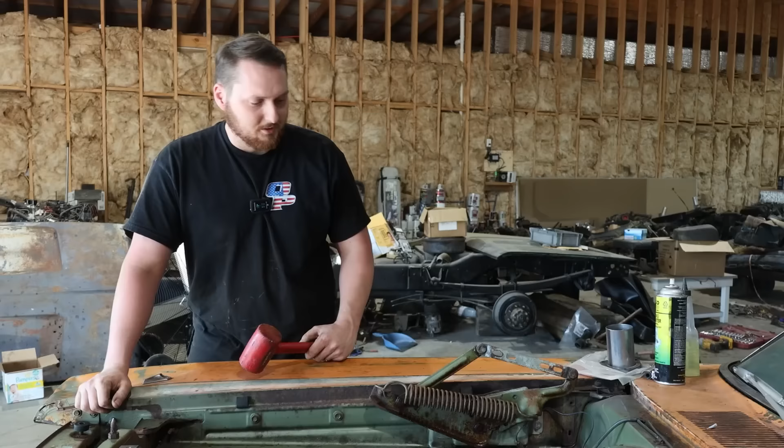So the hood hinges obviously don't work, as you can tell. We got that one to go up actually, so it's as high as it'll go. We'll try and get this one.

That it? It's kind of nice to not care about your paint. Yes, who cares? Spray it and I'll have to wipe it off. Who cares? Look what I got.

So no joke, this is a 68 to 70 Charger hood, and I bought this thing at a Mopar swap meet for $50 because nobody wanted it. I bought it from a friend of mine, he's like, I want it gone, I don't want to take it home. Obviously it's got a lot of rust right here and a lot of Bondo over there. Bought it for decoration and then never hung it up.

So I want to at least see if it'll do something. I know it'll work in the back, but the front is kind of where it might be a little goofy. If this works, I might cry. This was your idea, wasn't it? Yes, it was. Got my one in.

Do I have bolts? Oh, I do. This hood's a lot heavier than the other ones. Yeah, it is, a lot more metal left in it, ain't it? Hey, there's two started. I can already tell it's going to be way too long. Is it? Try and work it back and forth a little bit.

Now we're cooking. Yeah. That's so close, we got to slide it way back too. There's a huge gap, oh my God. It needs to go that way a little bit, but I told you it'd be way long. I don't know if we can do that. That's so good. Oh no. I don't think we can do that.

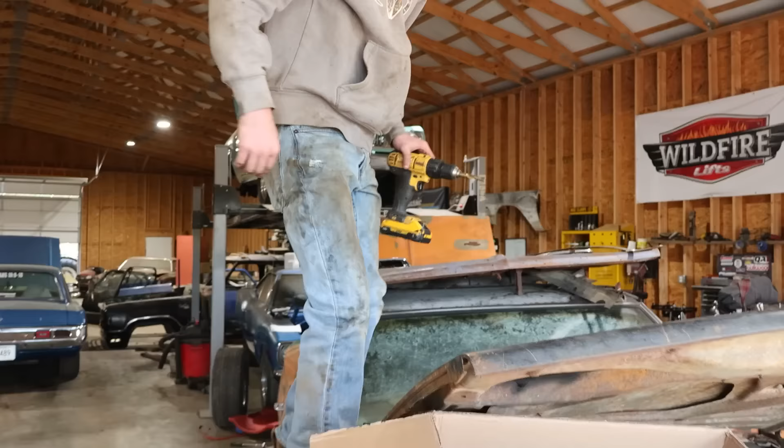Ah! Gets the idea, don't it? Yeah, it's somewhere in there. This side, I don't know. What just fell off? I'm sorry, Coronet, sir, you can't park there. It has to be done.

Oh, that's close, that's a long way to go though. We got a far way. Oh, hey, it's poking through there. Well, like you said, we can adjust it, I hope. Hood alignment.

Very nice. Welcome back to Back on Top of the Car Brothers, first episode of this one. Really excited, I hope I don't have to do this one much, but right now I'm drilling a hole in this hood so that it will maybe shut. Probably not, but it's worth it.

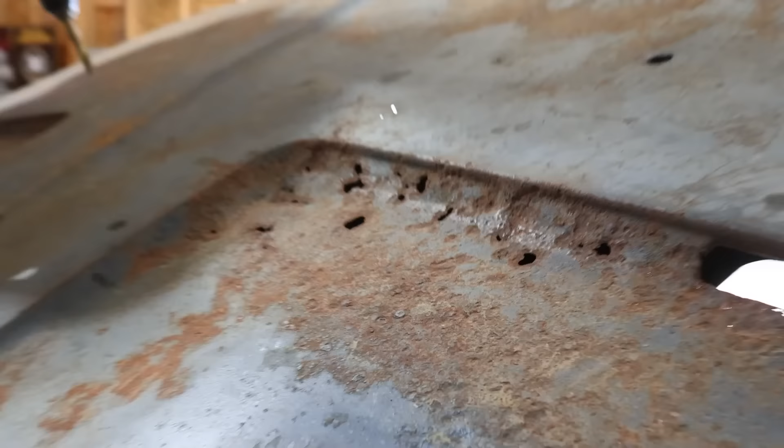Do you feel a little guilty? Yes, it hurts me this being a Charger hood, but it could be worse, right? It'll be close. That one's lined up right, it just can't shut because it hits the fender right here. This one's good, dead on. Sweet, so we just need to be aggressive with this right here.

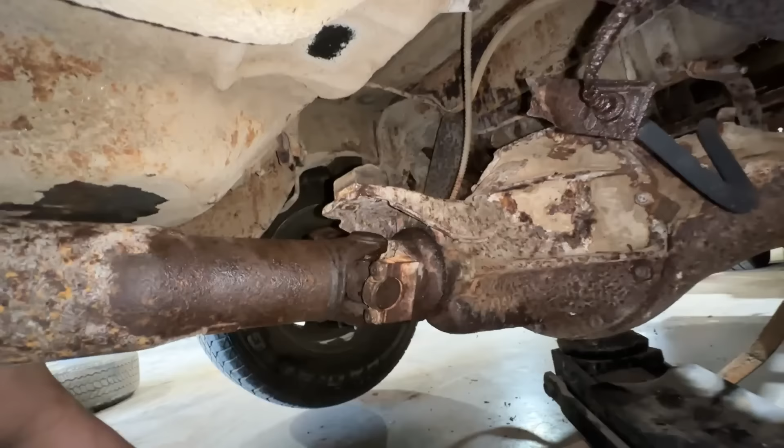Well, the U-joint on this thing was bad, we obviously need to replace it at some point, but it was stuck. Briar got it to come loose, and I was able to get the caps off and get them rotating. We're going to replace them eventually, but it'll work just for our testing purposes because we want to see if this thing will drive. It's been greased, moves a lot better than it did before. I'm going to slide it in. Well, there's a drive shaft back in, and it works for the most part.

So I wanted to check and see what kind of a center section we had. We talked about that Sure Grip, and guess what, there's the Sure Grip tag. And then over here, I know it's going to be hard to see, but that says 294. So that's the original center section, and best that I can tell, never been removed.

So to make the clutch work, I found this little piece of rod that O'Reilly sells, and I think it worked. It was like $17 or $18. I just stuck a washer here, this nut here, and then bolted it to the original Z-bar. So go ahead and mash it, Briar.

Looky there, it works. Nice. So now we have a functioning clutch pedal.

Well, we've got all sorts of goodies in here. First and foremost, a T-handle shifter, because you need that. I bought that at a swap meet for like five dollars, fifteen years ago, a long time ago. But now we can shift through all the gears and obviously be racing, because that's only legal on a track, or in Mexico. But anyway, we've got two nice little seats. This is a 215/70 R14, can't remember what flavor that one is, but it'll do.

And then when I slide up in here, I had some wiring that I rigged up together. One of these wires goes over to the coil, and one goes to the battery, so when I connect these two, our coil should be hot. This wire goes to the ignition switch, which goes to our starter solenoid. So when I touch these two together...

It's in gear, it's in gear. Oh, it is? It was rolling. That should be neutral right there. That was weird, let me push the clutch in. How's that? How about that? That's probably smarter, ain't it? I thought it was in neutral the whole time. Kind of scared me, it just took off.

Not moving? Now it is. First and second, how about third? Third and fourth.

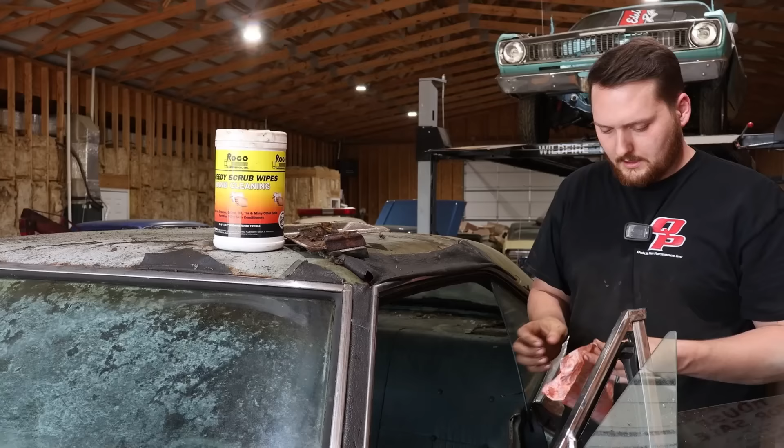Yeah, get some of my Speedy Scrub wipes, wipe down the windshield because can't see and it's all nasty on the inside.

Oh wow, hello, it's me. That's it, that's the ticket. Basically restored at this point.

Surely the parking brake's not holding. Surely not, because I thought they were all rolling when we brought it up here. They were, and it was just rolling a second ago. You know, that's the funny thing, probably all of them look like this. This one just happened to not roll.

Ooh wow, oh my gosh. Done. That's a great pile, look at there, like nothing even happened.

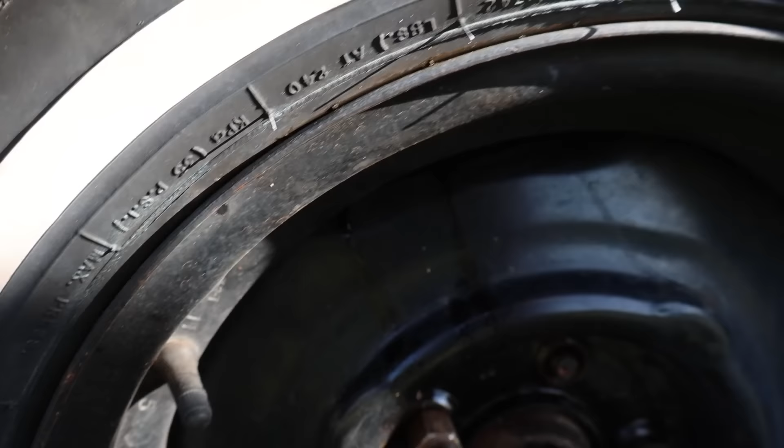They were tight, so maybe that's where we quit for today. That was awesome, that was loud. I did not expect that to do that at all. I got pelted.

What have we done? This car doesn't know what's hit it. No, it doesn't really.

Properly ventilated. Now look. What? That never, ever gets old. No. This is awesome. Yes, just a little rattly. Yeah, a little?